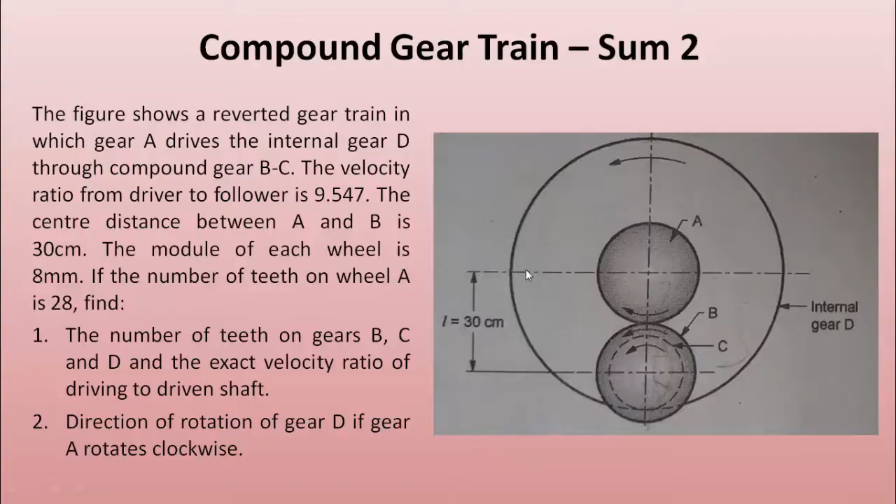So we will be solving the question. This is a slightly difficult question, hence I request all of you to please pay good attention to what I am teaching right now. It is slightly difficult, but if you try to follow it step by step, it will be quite easy for you.

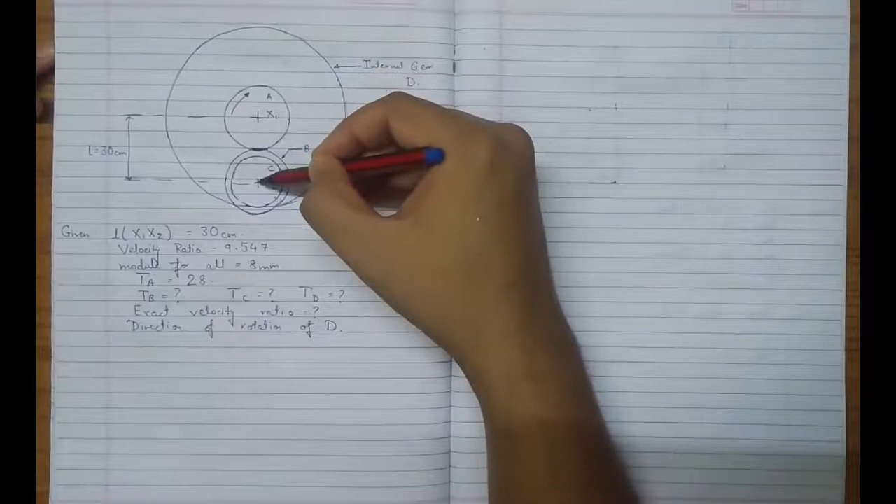The first thing we see is that we have to find the number of teeth on all these different gears. Basically, gear A is meshed with gear B, and they have also given us the distance between the center of gear A and the center of gear B. This distance is equal to 30 centimeter.

Using these two things, we can find out the number of teeth on gear B. How can we find out? This total distance is radius of A plus radius of B. So we can write radius of A plus radius of B is equal to 30 centimeter.

Because our module is in mm, we will convert this centimeter into millimeter, so that will be 300 millimeter. So right now we know that RA plus RB is equal to 300 mm.

Now rather than writing radius, we can write radius as diameter divided by 2. So this will be dA by 2 plus dB by 2, because radius is half of diameter. So we get these values.

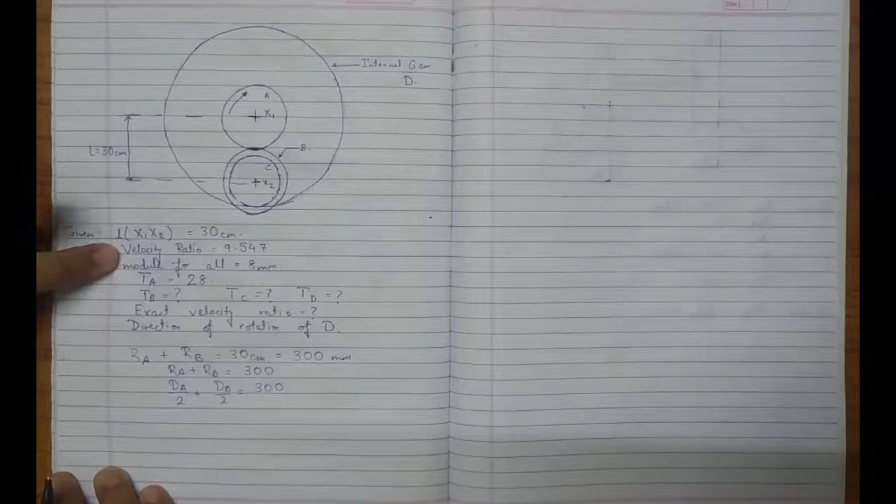Now here we have been given the number of teeth on A and the module of the gears. We know that module is equal to pitch circle diameter upon number of teeth. So pitch circle diameter is module into number of teeth, so we can write that over here.

Module into number of teeth on A divided by 2, plus module into number of teeth on B divided by 2, is equal to 300.

Module for mating gears is always equal, so we can take that module out. They have given us that module for all the gears is 8 mm, so we can take out module as common.

So it will be module by 2 taken out common, TA plus TB equal to 300. Module has been given as 8 mm, so 8 divided by 2 will be 4, and it is TA plus TB. TA is given as 28, so substituting all these values we get 4 into 28 plus TB is equal to 300. Now substituting these values and carrying out some calculations, we can find out the value of TB.

So 28 plus TB is equal to 300 divided by 4, which equals 75. So TB will be 75 minus 28, which equals 47. So that is how we found the value of TB.

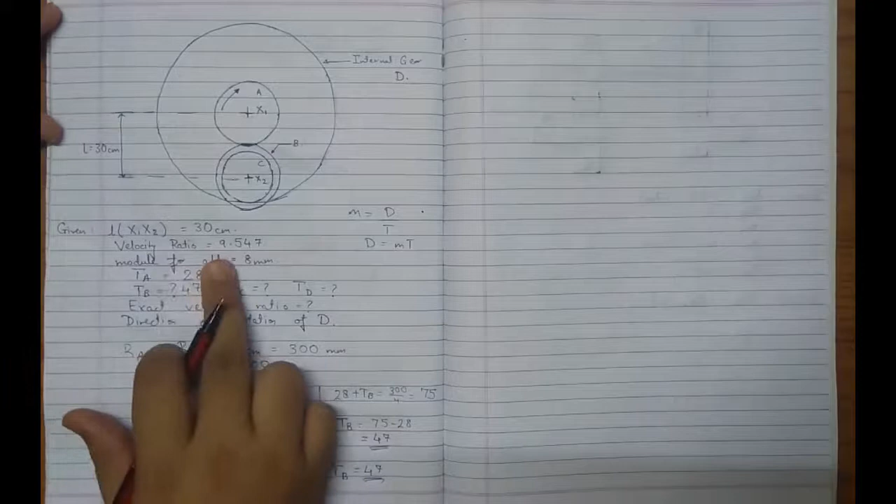It is 47. Next, we have to find the number of teeth on C and the number of teeth on D. This becomes slightly difficult, but they have given us the velocity ratio. In this case, velocity ratio is 9.547.

But the problem in this question is that the velocity ratio, A is the driver. A is rotating in clockwise direction. Because of A, B is meshing with A and B is rotating in anti-clockwise direction. B and C are compounded together, they are on the same shaft, so C is also rotating in anti-clockwise direction.

But see, what is the difference? C is internally meshed with gear D. Gear D is an internal gear, so C is internally meshed with gear D. Whenever there is internal meshing, the direction of rotation is the same. Whenever there is external meshing, like in this case, the direction is changed, it becomes opposite. But in case of internal meshing, direction remains same.

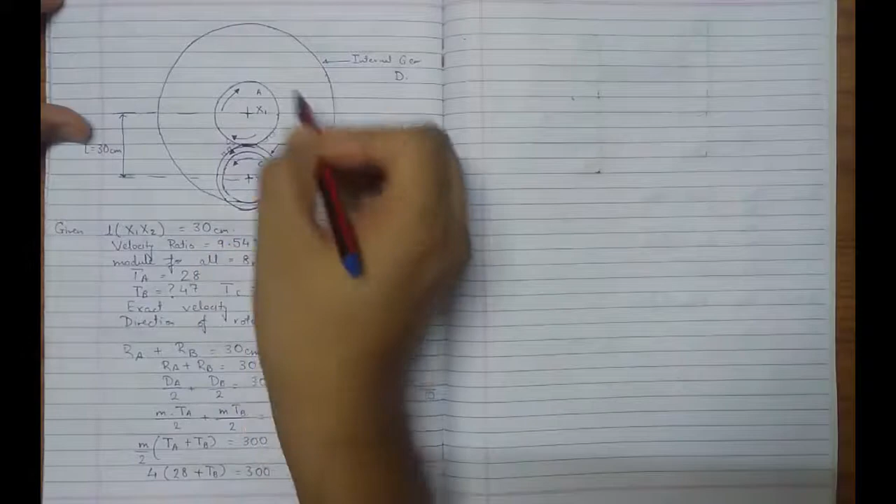So direction of C is also anti-clockwise, and direction of D will also be anti-clockwise. You have to take this into account. So we found out the direction of rotation of D, which is anti-clockwise.

In this case, A is the driver gear and the final driven gear is gear D. But as we can clearly see from this question and diagram, the RPM of A will be greater than the RPM of D. So this velocity ratio is not velocity of driven upon velocity of driver.

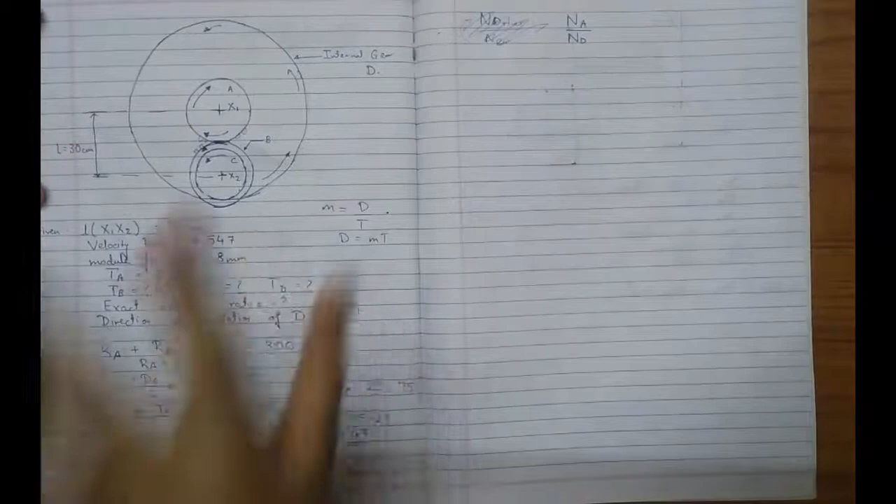They have given you the ratio of velocity of A upon velocity of D. In exam, this might happen - you have to look at the diagram and see which gear will have higher velocity and which will have lower velocity. So A becomes your driver, D is your final driven. But in this case, velocity ratio is the ratio of velocity of driver divided by velocity of driven. This is a slight change. So they have given NA upon ND is what?

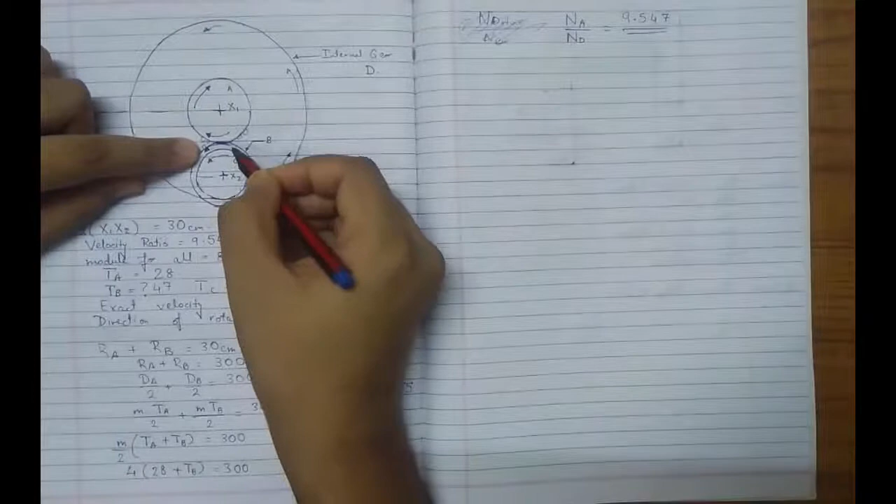9.547. So how can we find out this ratio? What is this ratio dependent on? A is meshing with B, and C is meshing with D. So ultimately, velocity is transferred from A to B, then from B to C since it is a compounded gear, and then it is transferred from C to D.

So how can we write this? We can write NA upon NB is equal to TB upon TA, and NB is equal to NC, and NC upon ND is equal to TD upon TC. This is our normal meshing of gears - this is because they are compounded together, and this is because of normal meshing. So how can we write NA upon NB into NC upon ND is equal to TB upon TA into TD upon TC.

But NB is equal to NC because they are compounded, they are on the same shaft, so we can cancel these out. So what is the ratio of NA upon ND? It can be given by TB upon TA into TD upon TC. Okay, so we get this.

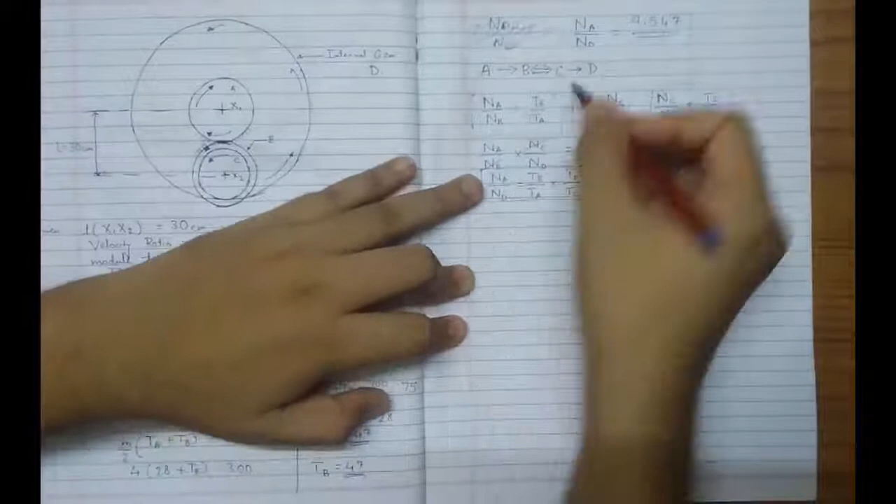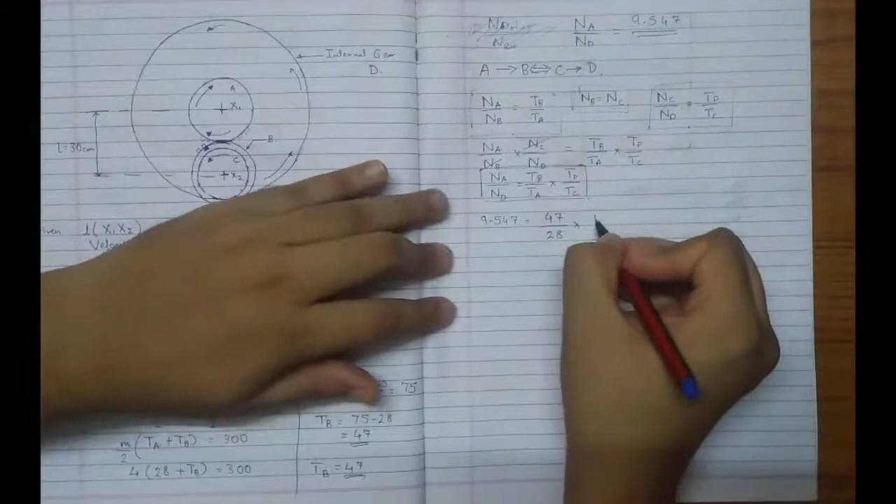Now in this, what they have given, NA upon ND is 9.547. 9.547 is equal to TB upon TA. We have the value of TB, we have the value of TA, we can substitute it: 47 upon 28. TD upon TC, we don't know either, so we will write it like this only. We can calculate this and find the ratio of TD to TC.

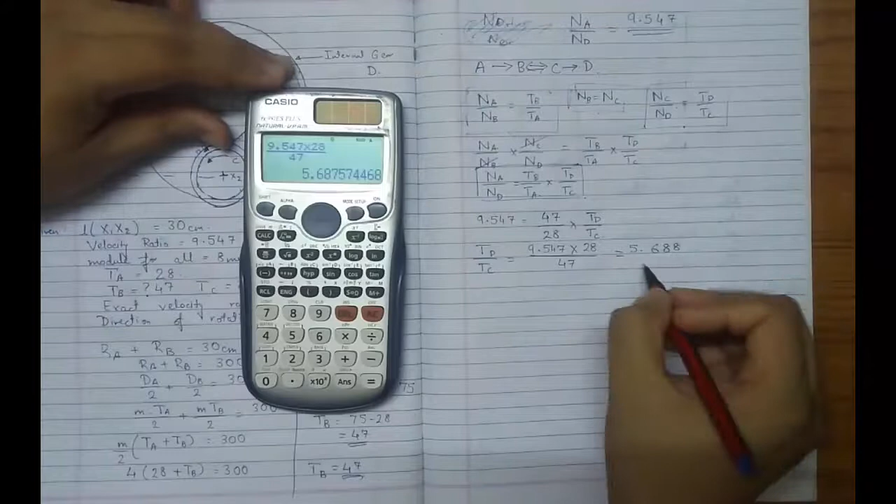So what will it be? TD upon TC is equal to 9.547 into 28 upon 47. Cross multiply: 9.547 into 28 divided by 47, that comes out to be 5.688. So we get the first equation: TD is equal to 5.688 times TC, taking TC over there.

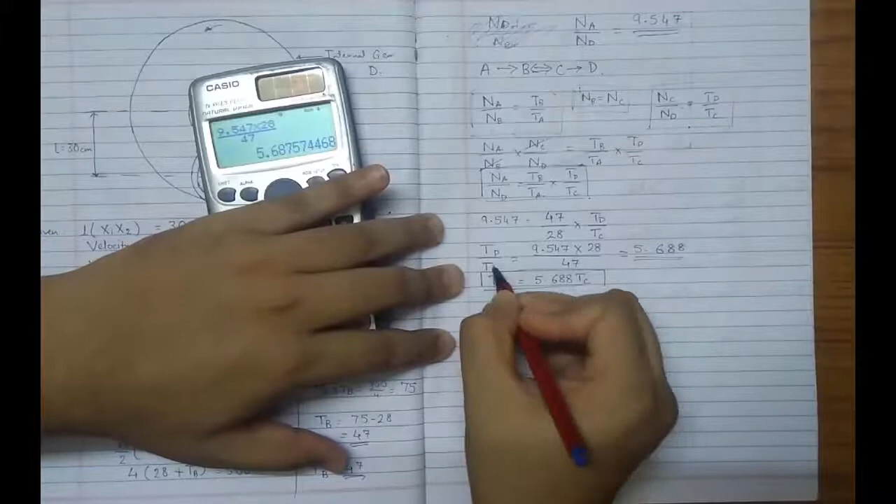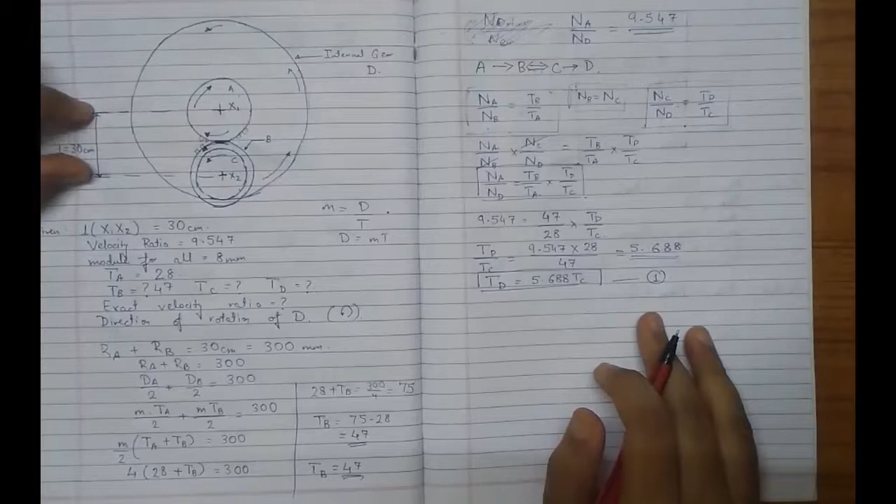Now what is another thing that we know? Because we have been given this distance, what other relation - see, there are two unknowns, TC and TD. So we need two equations to solve these two unknowns.

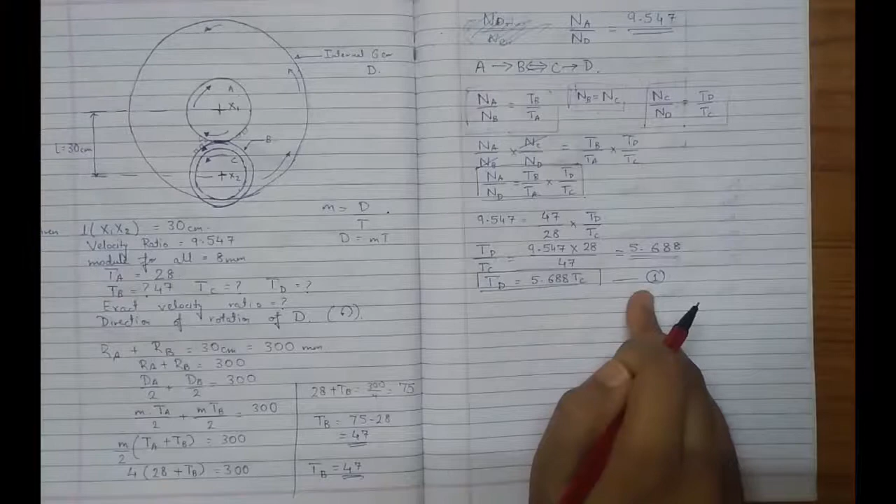We already found out one equation, we have to find out another equation. To find out another equation, we can use this logic. We know the distance between these two centers, but we don't know any other distance. But we can do like this.

This is the total radius of gear D. This radius of gear D can be divided into three parts. What are the three parts? This is part 1, this entire section is part 2, and this small part is part 3.

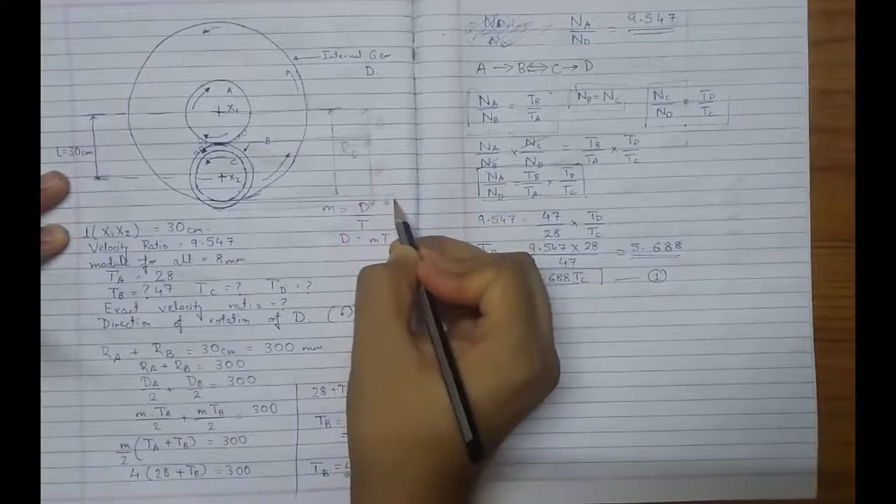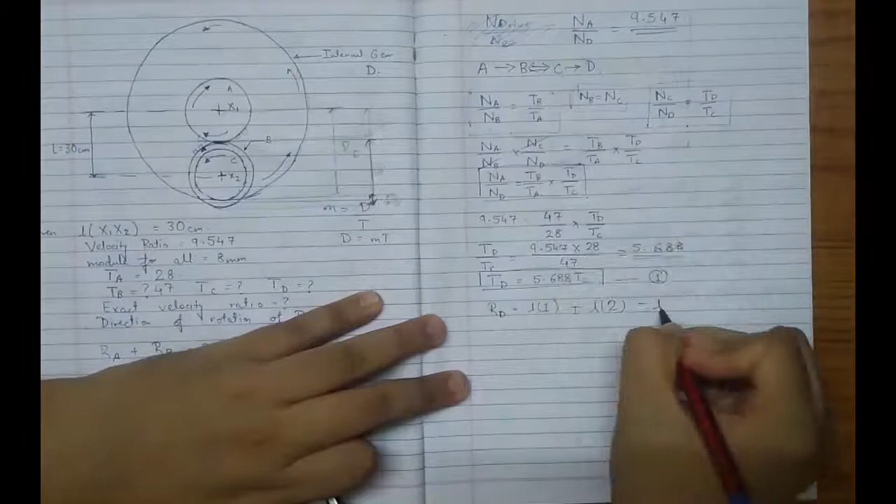So what is the radius of D? We can write radius of D as length of part 1 plus length of part 2, minus length of part 3, minus this small distance. This will give me the radius of this internal gear D.

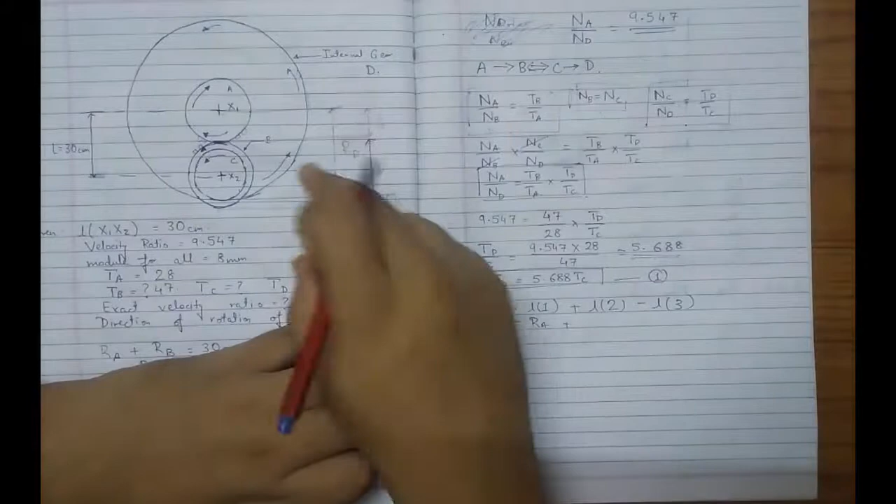What is length of part 1? It is radius of A. What is length of part 2? This whole is diameter of B. Minus length 3, what is this small distance? Radius of B minus radius of C. This is what your radius of D equals.

Substitute this, we will multiply both sides by 2, converting radius into diameter. So we get diameter of D is equal to diameter of A plus 2 times diameter of B, minus diameter of B minus diameter of C. We've just multiplied both sides by 2, so diameter of D equals diameter of A plus 2 times diameter of B minus diameter of B, plus diameter of C.

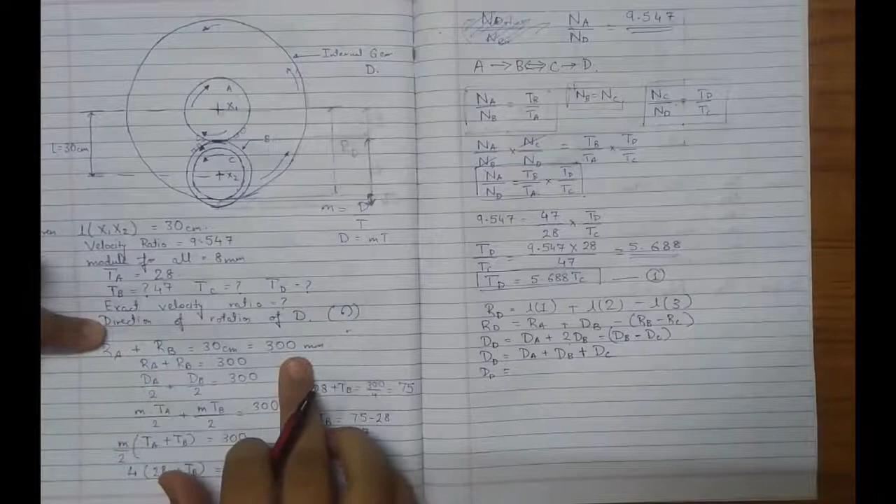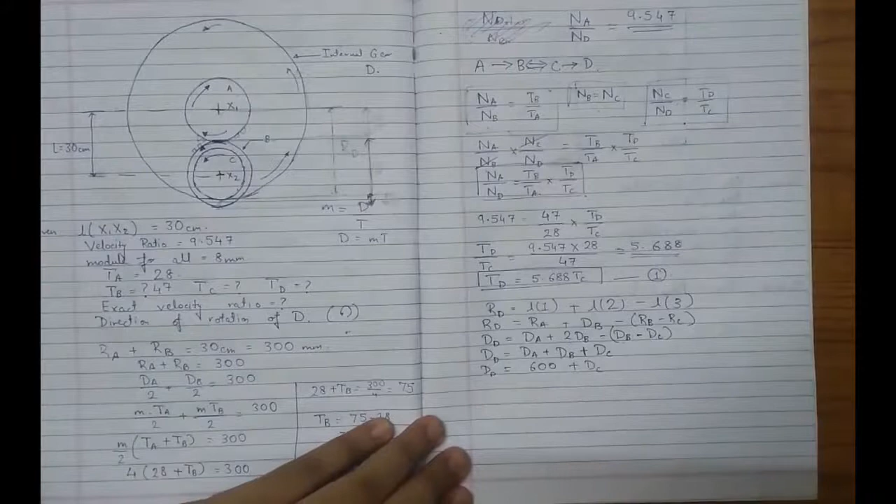So what becomes diameter of D? We have radius of A plus radius of B is 300mm, so diameter of A plus diameter of B will be 600mm, multiplying by 2, plus diameter of C. Using this we can find another relation: DD minus DC is equal to 600, taking DC to this side.

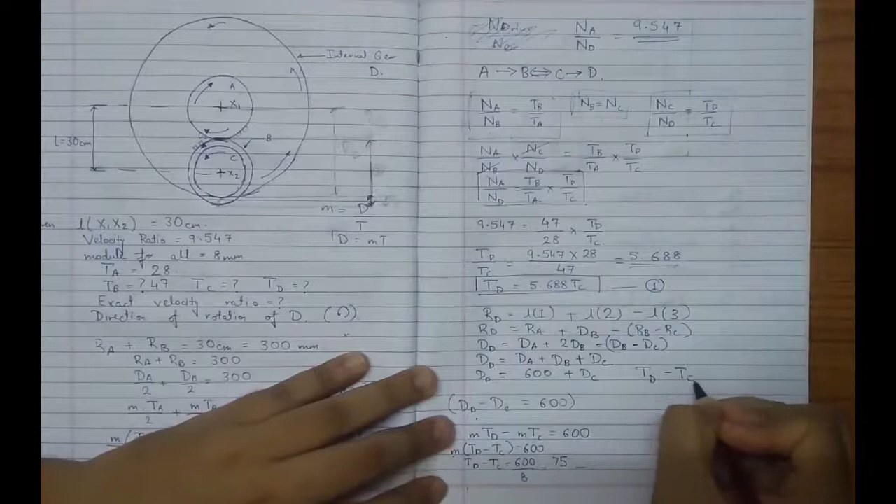Now there's also a relationship - this equation is in terms of diameter, this equation is in terms of teeth. We can convert diameter into teeth using: diameter is module into number of teeth. So module into TD minus module into TC is equal to 600. Taking out module common, TD minus TC is equal to 600. Module is 8, so TD minus TC becomes 600 divided by 8, which is 75. This becomes our second equation: TD minus TC is equal to 75.

I'll just write it here so I don't have to turn the page. So this is my second equation. What is my first equation? Rewriting it, taking this over, TD minus 5.688 TC is equal to 0.

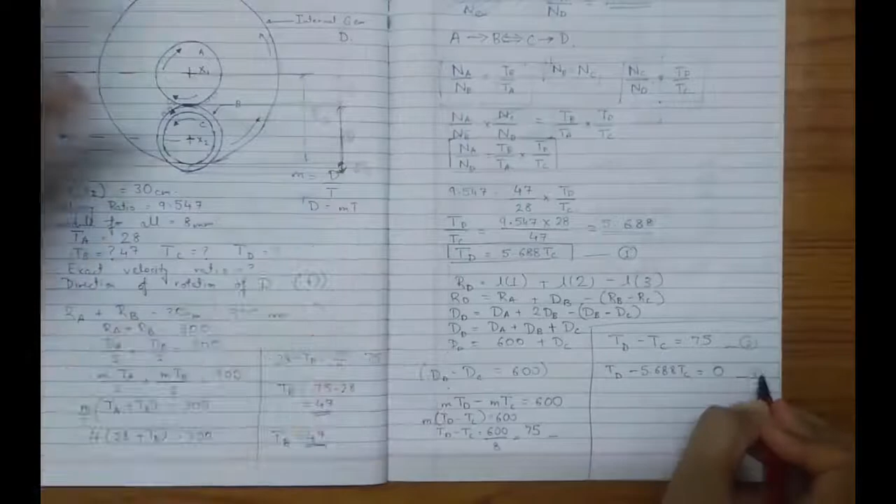These are two simultaneous equations, I can solve them on the calculator. TD minus TC is equal to 75 and TD minus 5.688 times TC is equal to 0. So I get TD's value as 90.99. Now, number of teeth can never be in decimal points, so number of teeth will always be a whole number. So TD becomes 91 and TC becomes 15.99, which is 16.

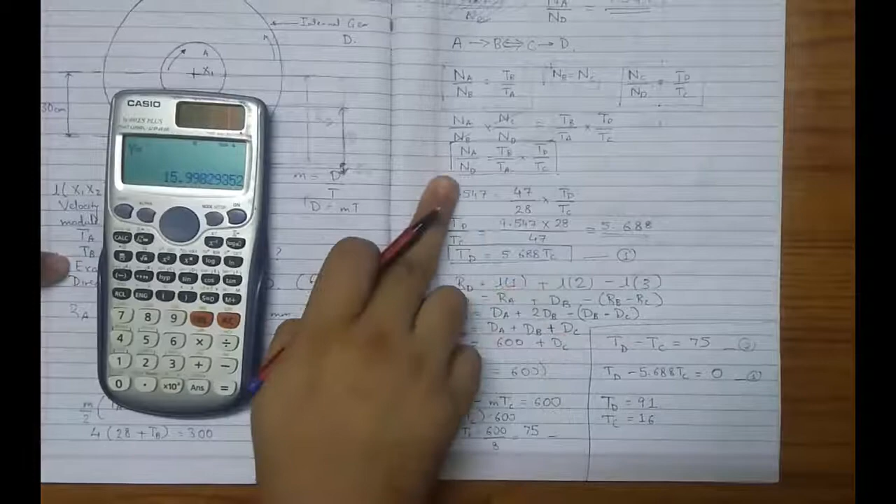So we found out TC, which is 16. We found out TD, which is 91. We found out the direction, and what is the exact velocity ratio? We have the equation for exact velocity ratio: NA upon ND is equal to TB upon TA into TD upon TC.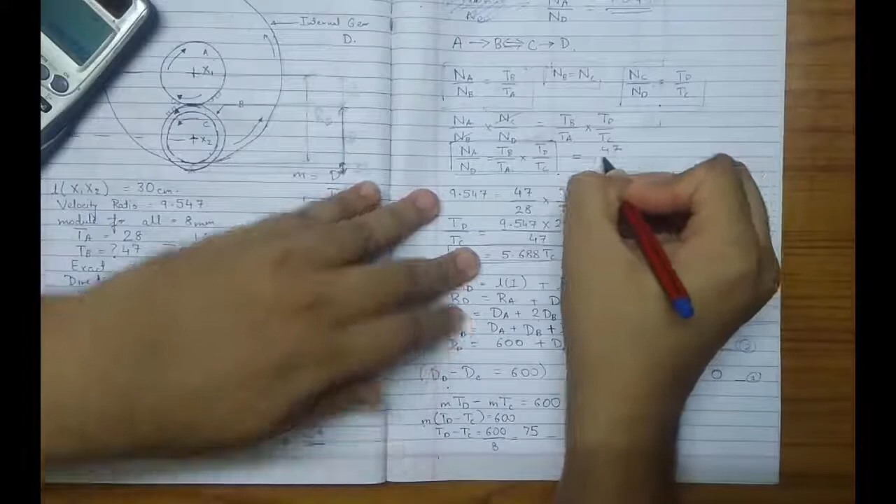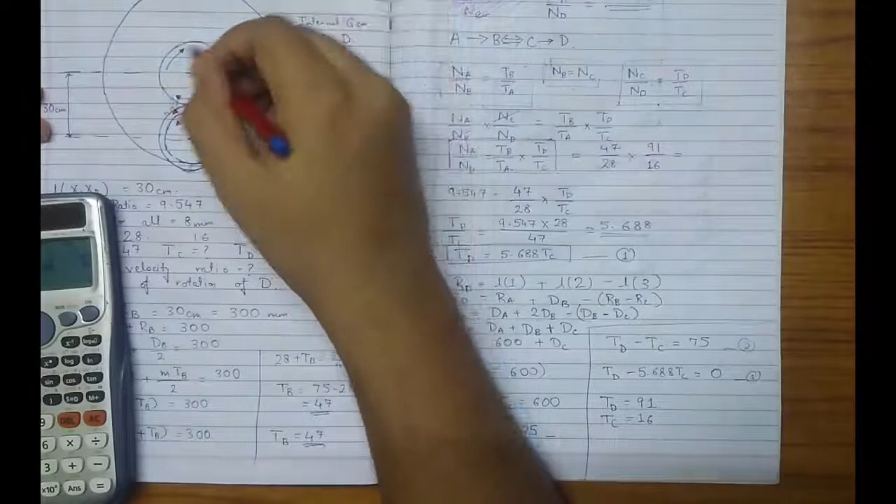So we can substitute these values. TB is 47, TA is 28, into TD 91 upon TC is 16. Substituting all these values, we can exactly know what is the velocity ratio - meaning for how many rotations of A, how many rotations of D will take place. That is the velocity ratio - how many rotations of A and only one rotation of D.

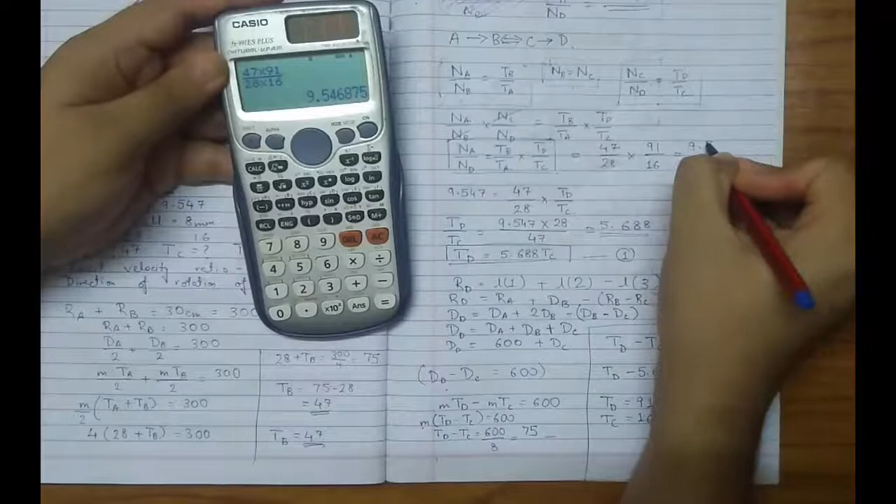So the exact ratio will be 47 into 91 divided by 28 into 16, which is 9.546875. That is almost the same as what they have given us, so our answer is correct. So we have found out all the things that they had asked us to find out.